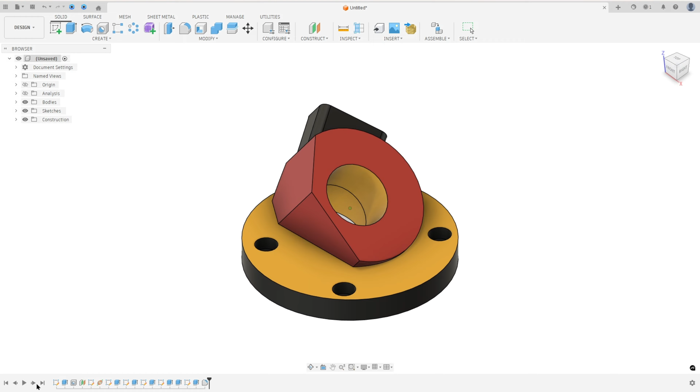Let's try one more challenge in Autodesk Fusion. In this video, you'll learn to use the Extrude, Hole, Offset Plane, Plane Along Path, and Fillet. So open Fusion and let's go.

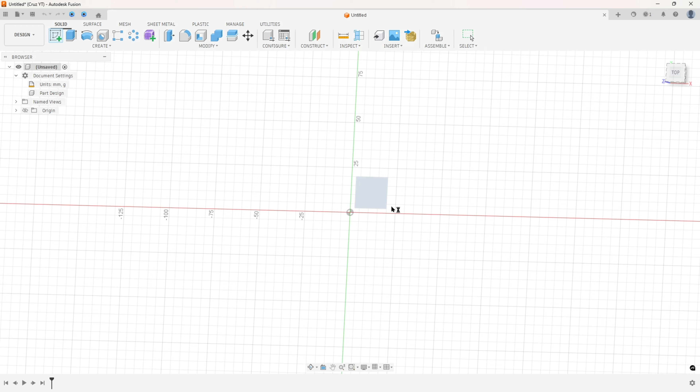The first step to create this part, we will select the top plane and make this sketch. We will create the base first. The base has a diameter of 128 millimeters. So open Fusion, go to create a sketch, select the top plane, select a circle, make a circle here with 128. And in this sketch, we will create this point for reference to create this hole.

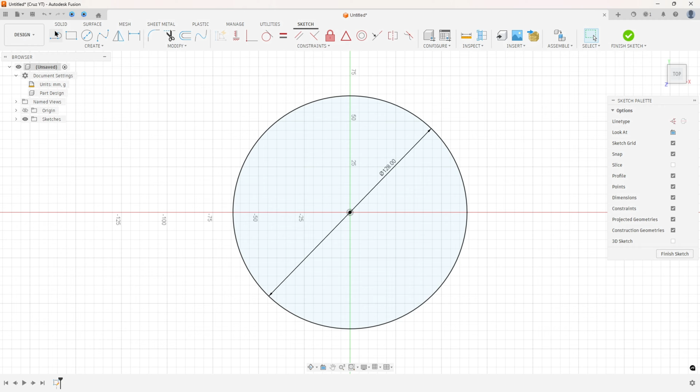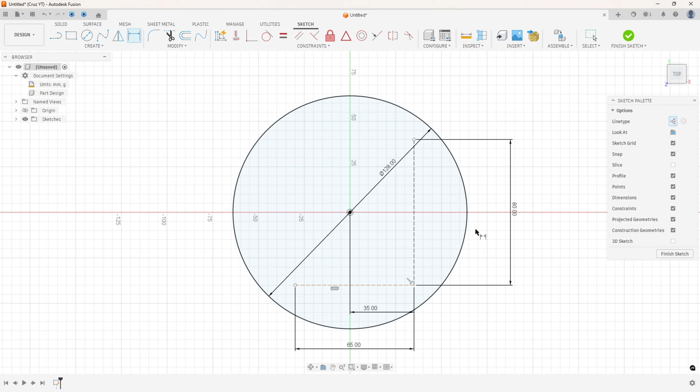Here we will create a construction line with 65 millimeters of length and another construction line here with 80 millimeters of length. The distance between this point and the midpoint is 40 millimeters and 35. So select line, construction line type. Make this sketch here, go to sketch dimension. The length here 65. The distance between this point and this line here is 35 millimeters. 80 millimeters here. And the distance here 40 millimeters.

Finish the sketch. The base has 15 millimeters of thickness. So go to extrude, minus 15. The minus is only to change the direction, operation new body, and press OK. Show sketch 1 again.

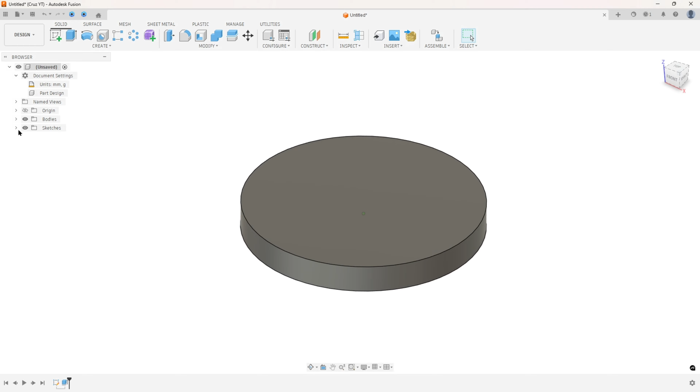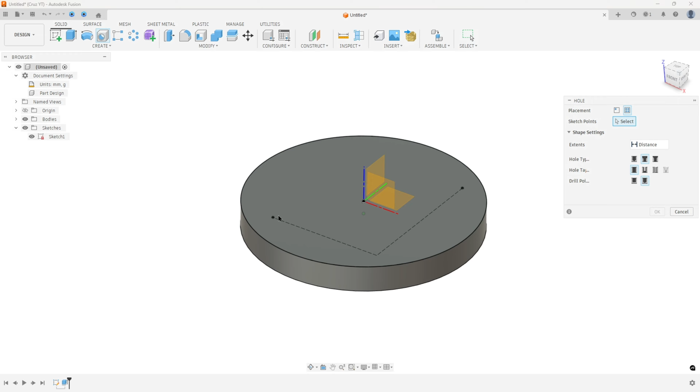This hole is a counterbore hole. The counterbore diameter is 14 millimeters, the depth 8 millimeters, and the diameter of the hole is 9 millimeters. So go to hole, the placement, select from sketch, select this point, the hole type, counterbore, the extent, you can select all, the tap type, select simple, diameter 14 millimeters, 8 millimeters, and 9 millimeters, press OK. Hide sketch 1.

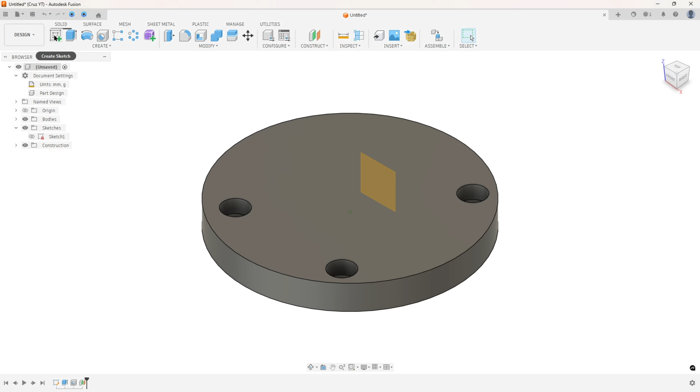Now we will create this plane here, but to create this plane, we will make some steps. The first step, we will create this offset plane here. The distance between this plane and the front plane is 5.9. So go to construct, offset plane, select the front plane here, the distance 5.9 and press OK. And go to create a sketch, select this new plane.

In this new plane, we need to create this point. To create this point, we will create a line here and this line here. The distance between this point and this line is 43 millimeters. And the angle between this line here and this one is 37 degrees.

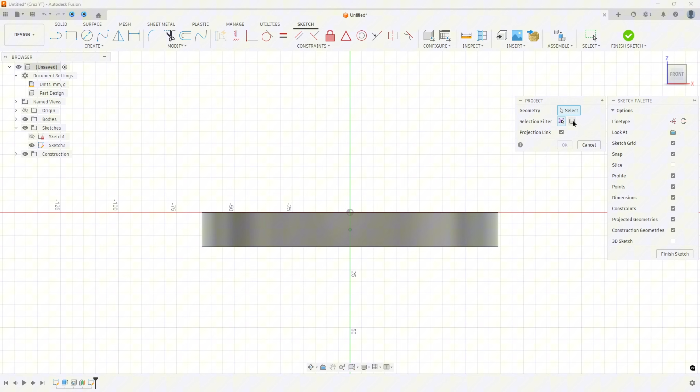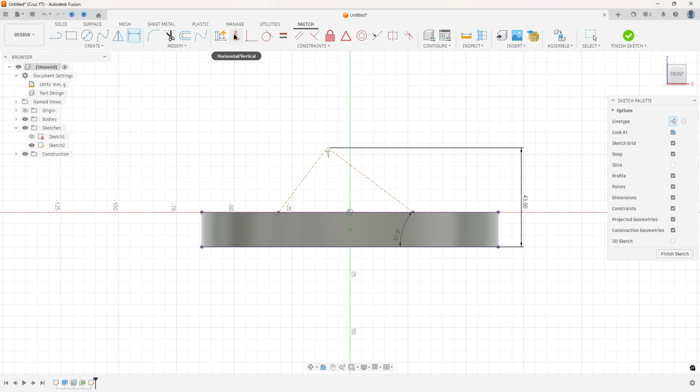So go to create, select project/include, project, selection filter body, select this body here and press OK. Select line, a construction line. Make this sketch here. Make sure that these two lines are perpendicular and go to sketch dimension. The distance here 43 millimeters and the angle here is 47 degrees. And go to constraint, select horizontal/vertical, select this point and the midpoint here.

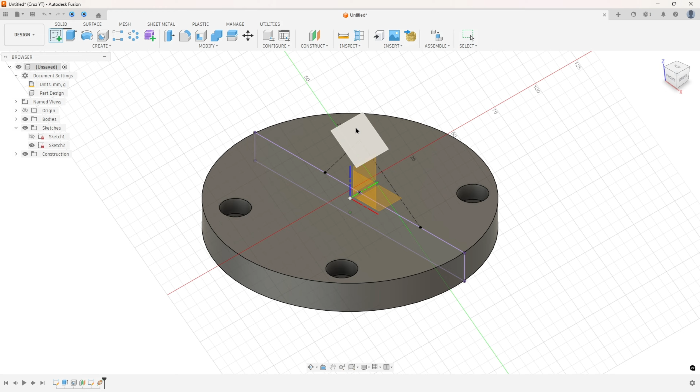Finish the sketch and go to construct, select plane along path, remove the chain here, select this line, the distance here is 1 and press OK. Go to create a sketch, select this new plane here. In this new plane, we will create a circle with 87 millimeters of diameter and extrude this to this surface.

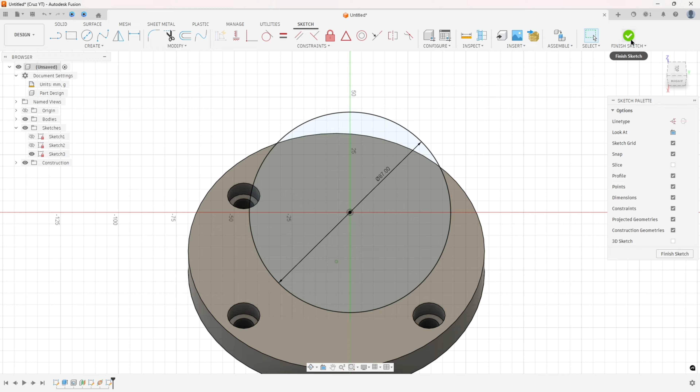So select the circle. Here in the center of this plane, make a circle with 87 millimeters of diameter. Finish the sketch, go to extrude. The distance here to object, select this face, operation join and press OK.

Now we will create some cut here in this cylinder. So select create a sketch and select this face here. To make a cut here, we will make a circle with 119 millimeters. And we will create this line here. The distance between this line here and this edge here is 44 millimeters.

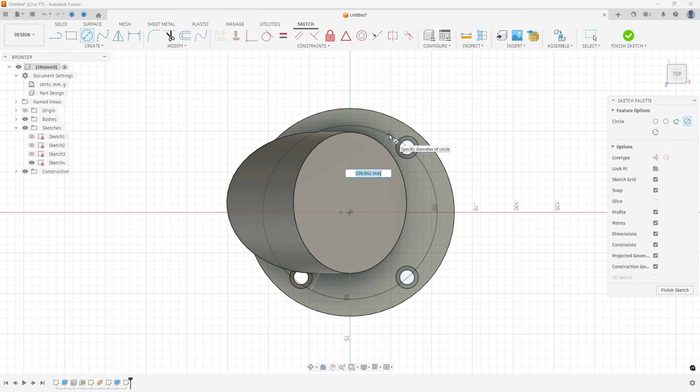So select a circle, click here in the midpoint, make a circle with 119 millimeters, and select a line, make a line here, and go to Project, select specified entity, select this circle here, and press OK. Go to Sketch Dimension, right-click, select Pick Circle/Arc Tangent, select this point here and this line. The distance here is 44 millimeters.

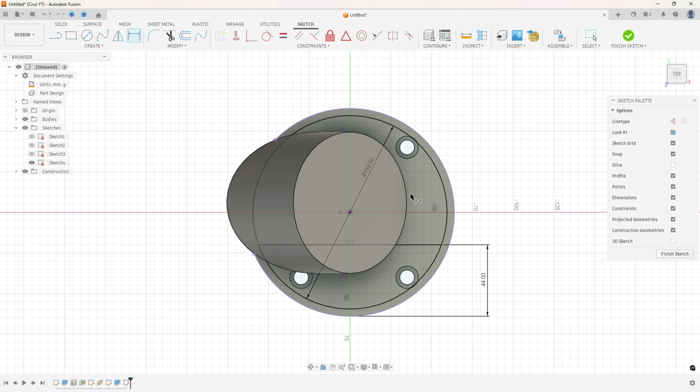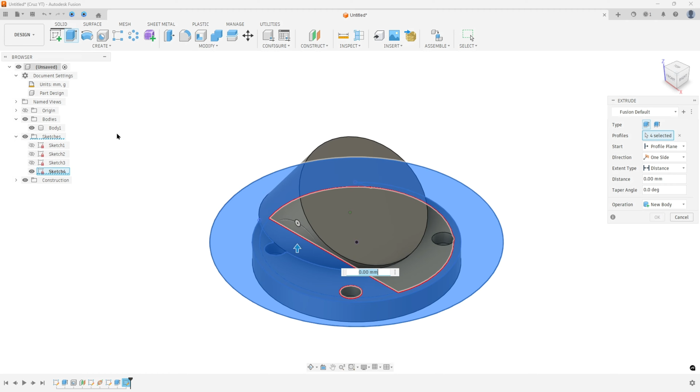And go to circle again, make a circle here with 180 millimeters, just to make a cut. Finish the sketch, go to Extrude, I will hide this body a little bit, select this profile, don't select this area. The extent type here will be all, operation cut, and press OK.

And now we will create another cut in this face. We will create this cut here, remove this area. So we will select this face here to create a sketch, and we will create this line. And the distance between this line and the midpoint, 15 millimeters. And here it is horizontal vertical with the midpoint.

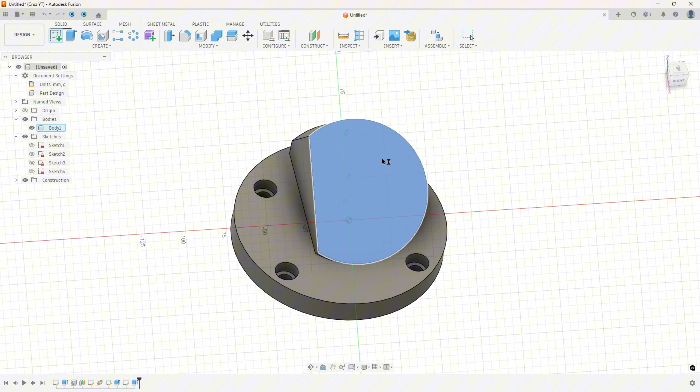So go to create a sketch, select this face, press letter P in the keyboard, and select this face and press OK. And select a line, make a line here. Go to constraint, select horizontal vertical, select this point and the center of this circle, and go to sketch dimension. The distance between this point and the center of this circle is 15 millimeters.

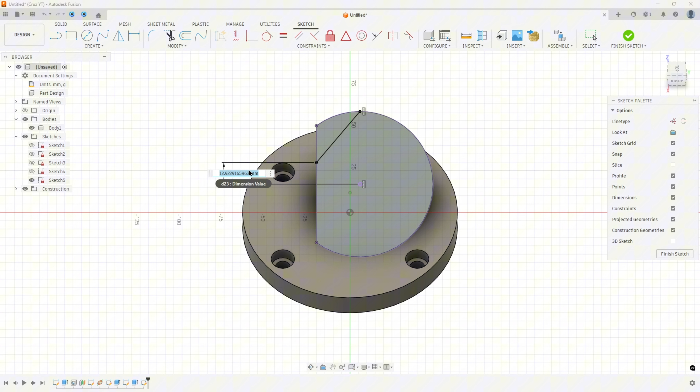Finish the sketch, go to extrude, select this face here, and the extent type, select to object, select this face, operation cut, and press OK.

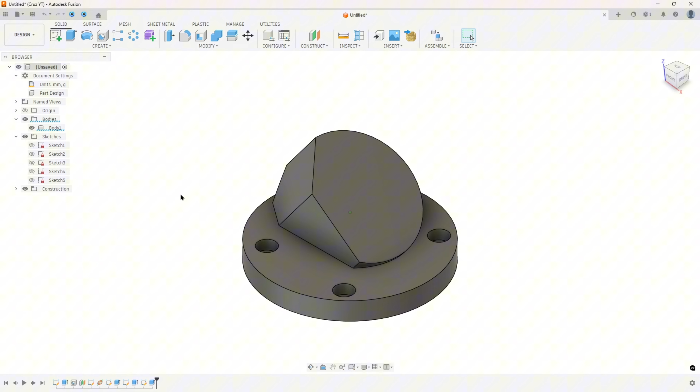And now we will create a hole in this cylinder. So we will create a hole here in the center with 40 millimeters by 30. And we will create a hole here with offset from this surface with 30 millimeters of offset and 45 millimeters of diameter through all this body here.

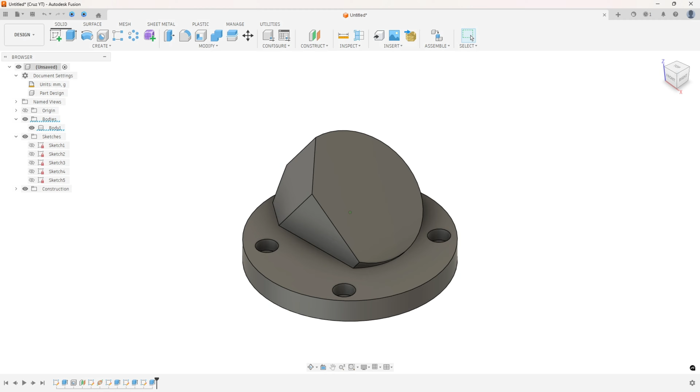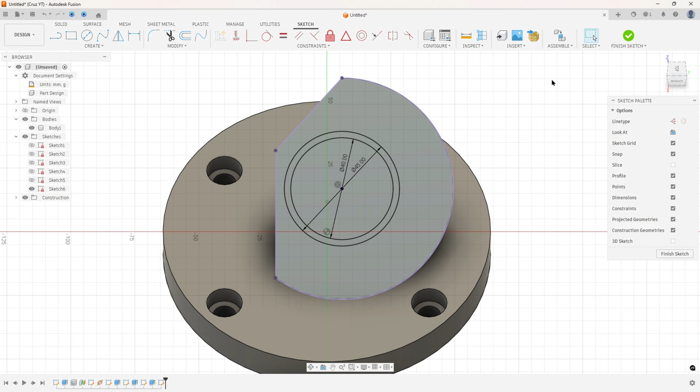So go to create a sketch, select this circle, press letter P in the keyboard, select this face and press OK. Select the circle, click here in the midpoint, make a circle here with 45 millimeters of diameter, and create another circle with 40 millimeters of diameter. And finish the sketch. Go to Extrude, select the circle with 40 millimeters, minus 30 millimeters of distance, operation cut, and press OK.

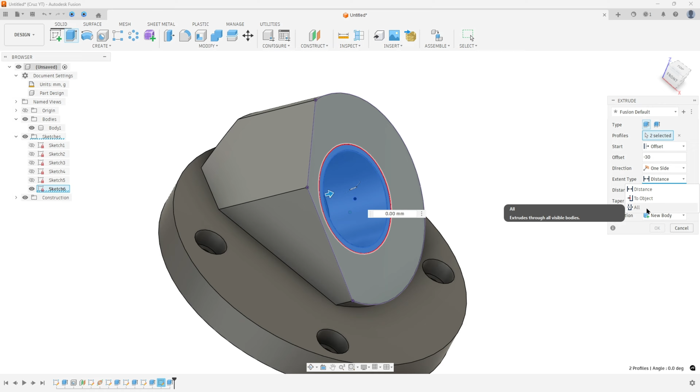And show the sketch 6 again, and go to Extrude, select both circles, and the start, select the offset, minus 30 millimeters, and the extent type, select all, and flip the direction, and press OK. We made this cut here. Let me flip here. Hide the sketch 6.

And now we will create this body here. So to create this body, we will select this face here again to create a sketch. And we will create this line here, and this line here, and this one. And the angle between this line here and this construction line, 65 degrees, and the distance between this line here and the midpoint, 52 millimeters.

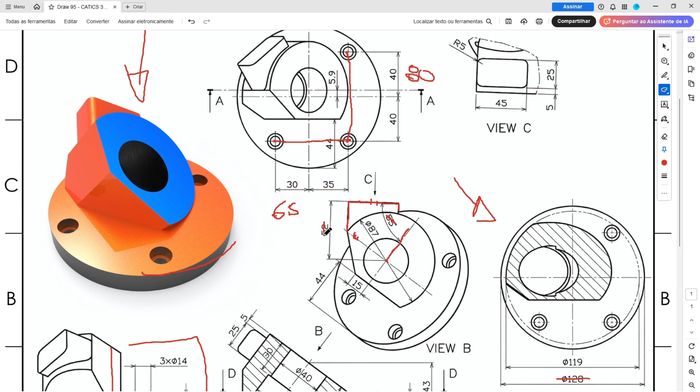So go to create a sketch, select this face, press letter P in the keyboard, select this face again, press OK, select line, a construction line, make a construction line here, and make a construction line here. Make sure that this construction line is horizontal and vertical, and select line again, but remove the construction line type, and make this sketch here. Make sure that these lines are perpendicular to each other, and go to sketch dimension.

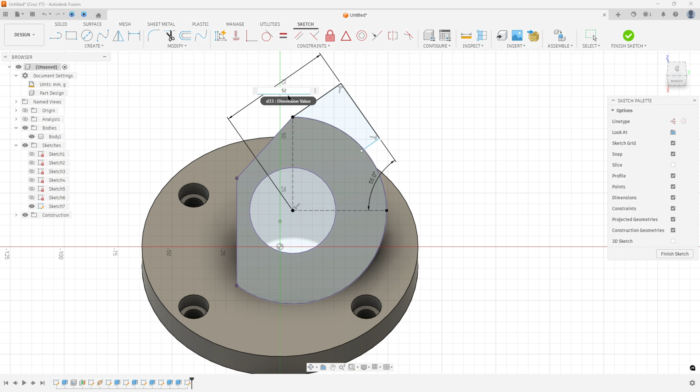The angle here, 55 degrees, and the distance between this line and this point here is 52 millimeters. Go to constraint, select coincident, make sure that this point is coincident with this line here, with this circle. And the length of this line, 45 millimeters. So go to sketch dimension, this line here has 45 millimeters of length.

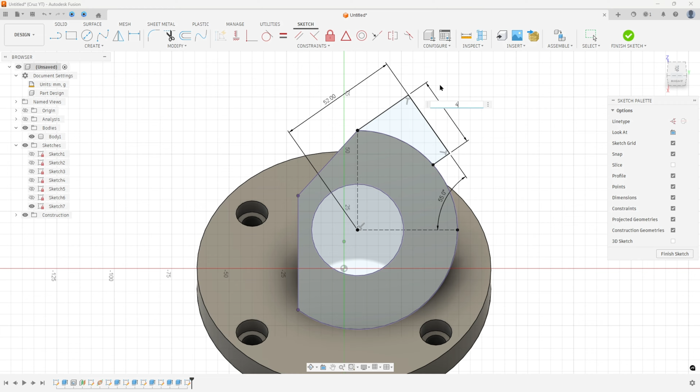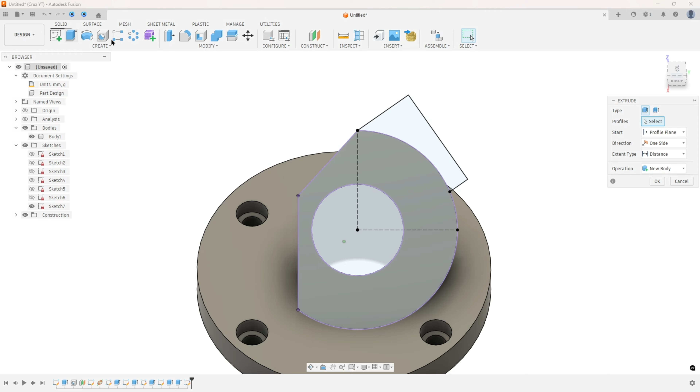And finish the sketch. We need to extrude this, but it has an offset of 5 millimeters. We will create this part here. We will extrude 25 and offset 5 millimeters. So go to extrude, select this profile. The start, select the offset. The distance here, minus 5 millimeters. And the distance, minus 25. Operation join and press OK.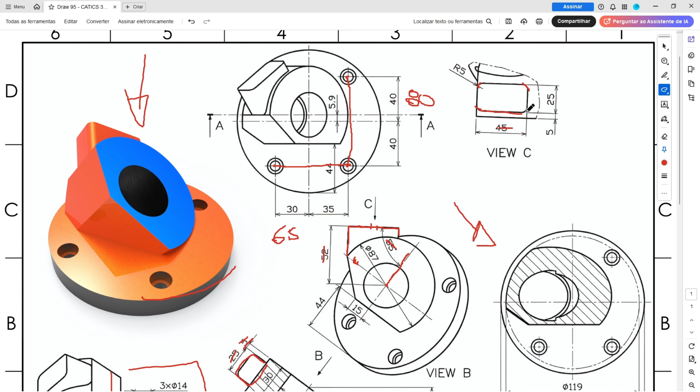And now we have a fillet here in this corner with 5 millimeters of radius. So go to fillet, select this edge here, this one. The radius here, 5 millimeters, and press OK. And here we finish our exercise.